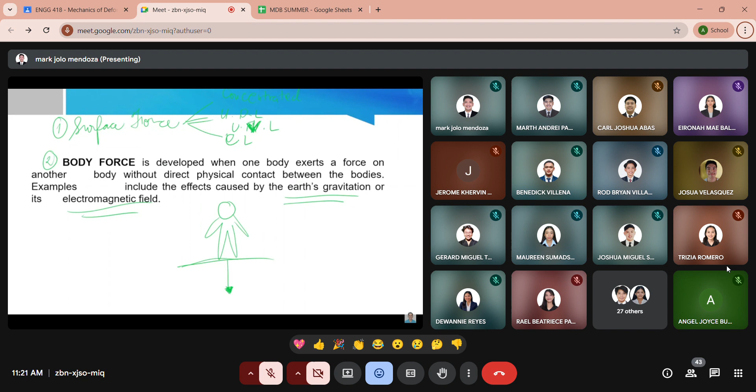Itong mga support reactions naman - ito yung mga surface forces that develop at the supports or points of contact between bodies. Tandaan nyo ito, for example itong beam, kung papansin nyo, yung type of connection niya is cable. So yung cable na yan, since siya ay may contact with the beam, nag-exert siya ng surface force.

Kapag cable yung given, ang in-exert niya is itong force na to, one unknown lang. Wherein, this is not really one unknown since may angle siya, so meron itong x component at y component - you need to consider the angle. Kung saan yung direction ng cable, yun lang yung force niya.

Then kapag roller naman, kapag sinabi sa tanong na may supported siya ng roller, yung force na ine-exert niya ay pataas, in vertical direction. Automatic yan pag roller.

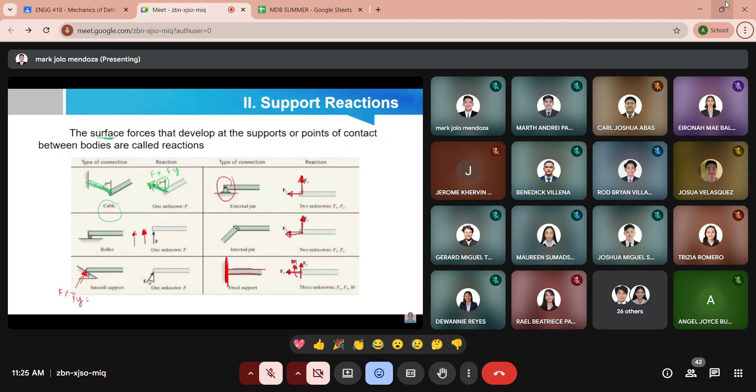Then syempre you already know this, equations of equilibrium. Kapag sinabi natin equilibrium, kailangan meron tayong balance of forces. Equilibrium of a body requires both a balance of forces to prevent the body from translating or having accelerated motion along a straight or curved path, and the balance of moments to prevent the body from rotating. This can be expressed mathematically by the two vector equations: summation of forces equals 0, and summation of moments equals 0. Kasi kailangan hindi mabago, o kailangan ay yung ating structure is safe or hindi siya mag-fail - yan yung equations of equilibrium natin.

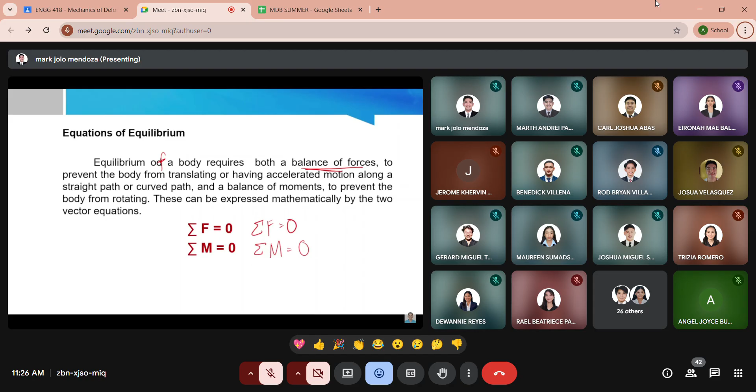Then, one of the most important applications of statics in the analysis of mechanics of materials is to be able to determine the resultant force and moment acting within a body, which are necessary to hold the body together when the body is subjected to external loads.

In order to obtain the internal loadings on a specific region within the body, it is necessary to use the method of sections. What is the method of sections? For example...

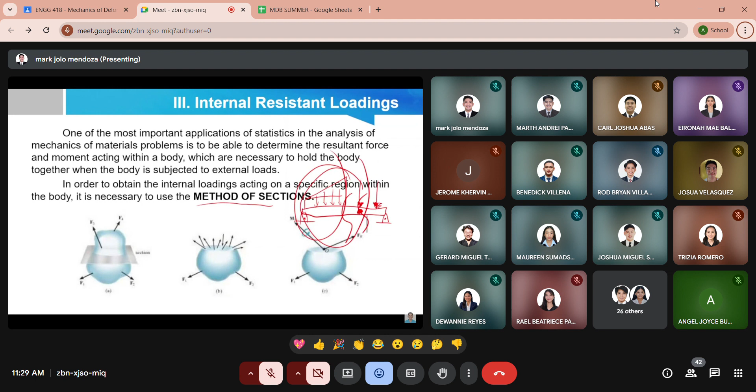So what are the types of resultant loadings? The first one is the normal force. This force acts perpendicular to the area. It is developed whenever the external loads tend to push or pull on the two segments of the body. For example, this is your force, and this is the area you're considering. It hits perpendicular, at 90 degrees. That is what we call normal force.

Then shear force is developed when the external loads tend to cause the two segments of the body to slide over one another. There's sliding, contact, for example between two plates. When these two objects slide with each other, the shearing force is experienced at this part. So that's where shearing force is experienced because the structure rubs or slides past each other.

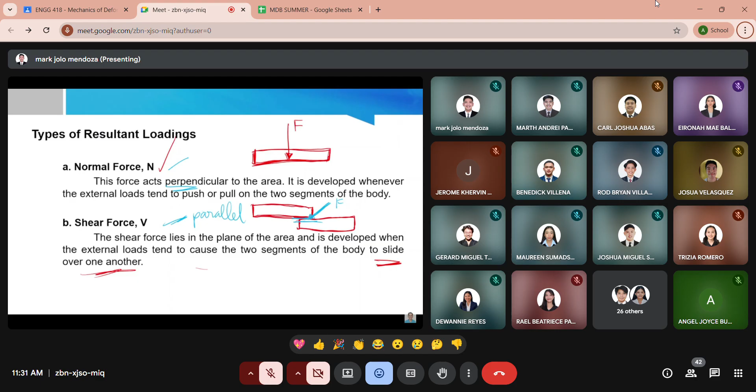Then torsional moment or torque is developed when the external loads tend to twist one segment of the body with respect to the other. This is expressed in Newton meter. The main difference is that torsional moment involves rotation - it has a twisting moment, it rotates.

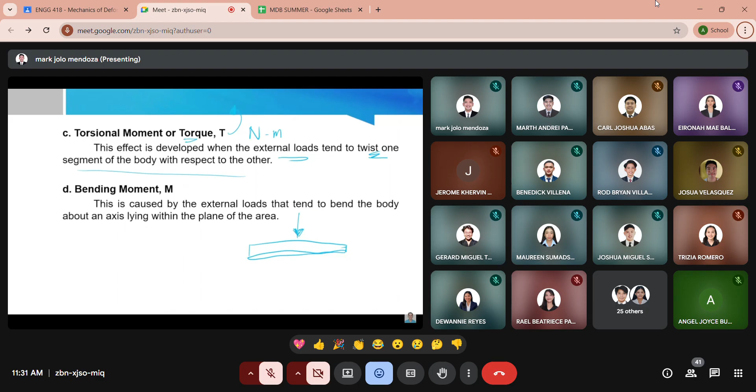Whereas with bending, like for example this beam - we apply a load, this is the external load we apply. What happens to the beam is it will bend like this. So this is bending moment.

When we talk about torsional moment, this usually happens in shafts. For example, this is the shaft. When it experiences external loads, it will tend to rotate. So that is torque or torsional moment. That's the difference between torsional moment and bending moment.

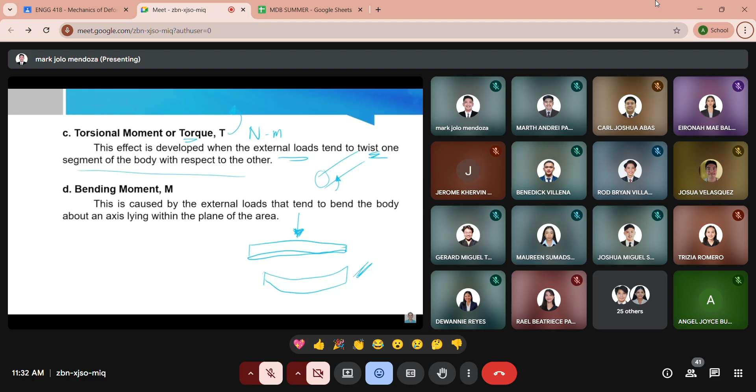So this is just a diagram showing the different forces and moments experienced when a body is applied with external loads.

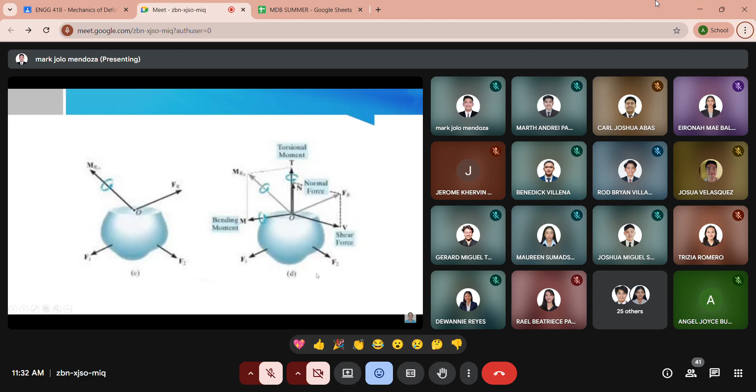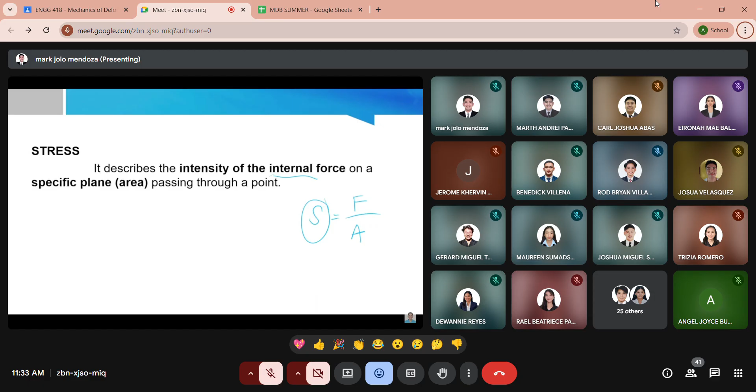Next is axial stress. First let's talk about stress. Stress describes the intensity of the internal force on a specific plane passing through a point. This is basically force applied per unit area. When you apply a force on a specific area, that point experiences stress. So stress is basically force over area. When we talk about axial stress, this is the intensity of the force, or force per unit area, acting normal or perpendicular to the area.

If the normal force pulls on the area, it is referred to as tensile stress, whereas if it pushes on the area, it is called compressive stress.

So sigma is equal to P over A, wherein P is our force, the internal resultant normal force, which is applied through the centroid of the cross-sectional area, and A is the cross-sectional area.

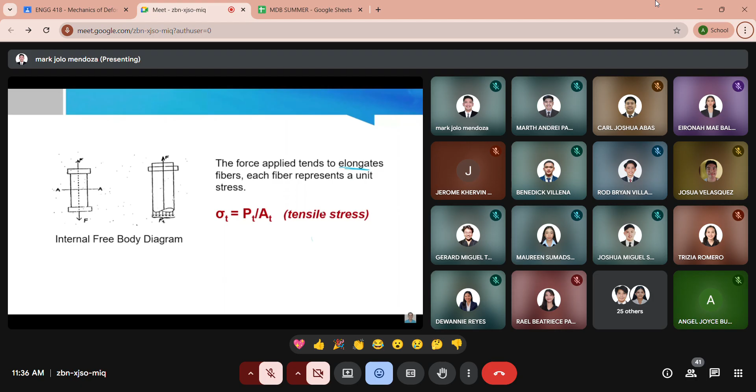Whereas when it tends to shorten the fibers - each fiber represents a unit stress - this is a compressive stress, when our forces tend to compress our fibers or our structure.

Then when we say shearing stress, from the word itself - the forces are parallel. So this is a stress caused by a shear force which tends to slide a member with respect to another.

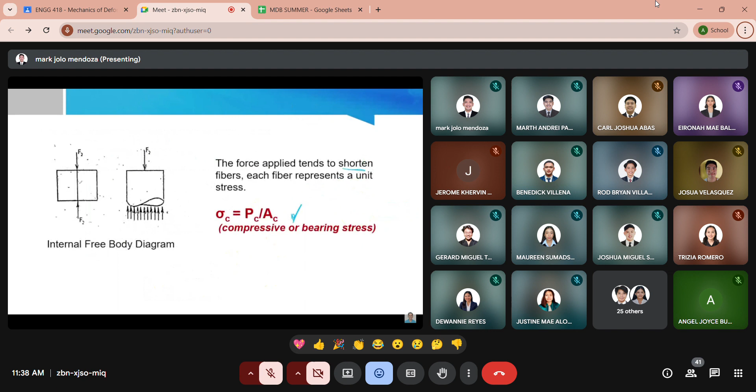But the difference is, earlier this P was still a force, but a normal force - the force perpendicular to the area. Whereas for shearing force, this is the force parallel to the area.

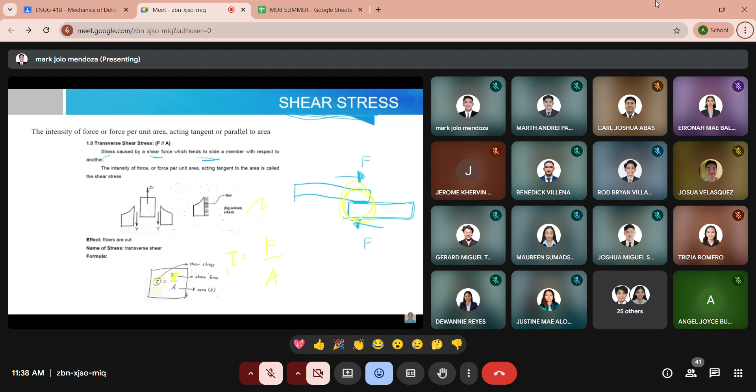So that's our formula for shearing stress. When this is a single shear, it's called a lap joint. Notice only this part experiences shear - only there does it experience shear.

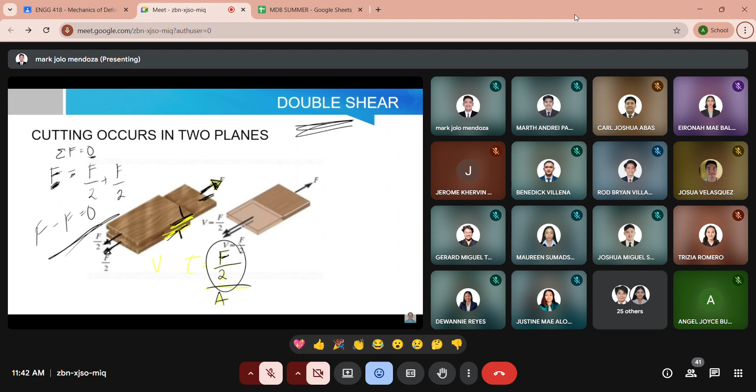So dito muna, let's just focus first on analysis ng internal loadings. I think next lesson yung may example ng actual stress and shearing stress. So dito muna let's focus on answering the internal loadings ng ating structures.

Paano natin siya gagawin? Una, kailangan nating i-establish lahat ng support reactions. Kailangan nating malaman kung alin segment yung may support reaction o kung alin yung wala.

At pagkatapos noon, need mo namang i-consider yung iba't ibang loads pa, like for example yung concentrated load, then yung uniformly distributed load, uniform varying load. Need mo silang i-consider, kuhanin yung mga resultant forces, and then pag nakuha niyo na yon, you can draw another free body diagram.

Kailangan niyo mag-establish, kailangan tama yung free body diagram niyo, considering all the supporting reactions and other external loads. Pag na-establish niyo na yan, kailangan niyong kuhanin yung equations of equilibrium, either the summation of forces equal to zero.

So this is the procedure for analysis in solving for internal loading. Let's have an example here.

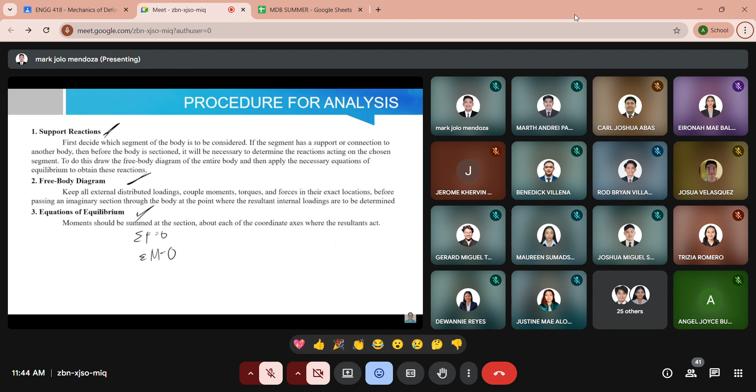Analysis, una, ang sabi natin, kailangan nating i-establish ang support reactions. Anong unang gagawin? Ang unang gagawin, sinabi sa tanong na ang shaft ay supported ng dalawang journal bearings.

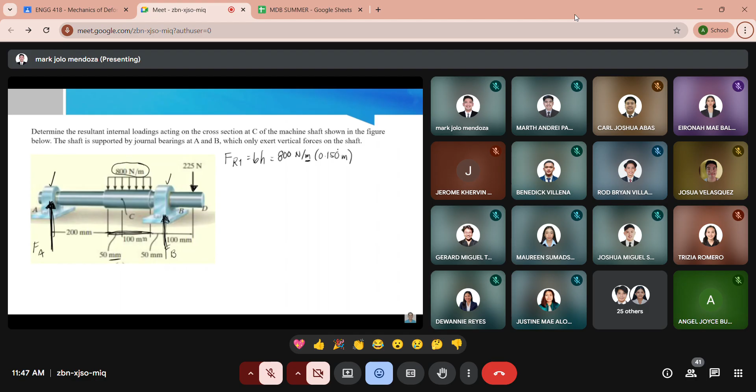So that's 800 Newton per meter times ano yung base niya, that's 150 mm. Tandaan, this is 150 mm, at ito ay naka per meter, so this is 0.150 m. This is equal to 120 Newton.

Yung position niya, ang position niya is at 1/2 ng base. So this is 1/2 times kalahati ng 0.150 m is 0.075 meters. Pwede natin siyang i-drawing kung ito ay 50, kung ito ay 50, at yung X1 ay 75 millimeters, so we can say na nandito siya sa part na 'to.

Nandito yung X1. Ano pa yung nakalimutan nating loadings? Wala na, so puwede na tayong mag-drawing. Second step is to draw a free body diagram. I-analyze natin, i-redraw natin yung shaft. Yan, for example, yan, sige, wait lang.

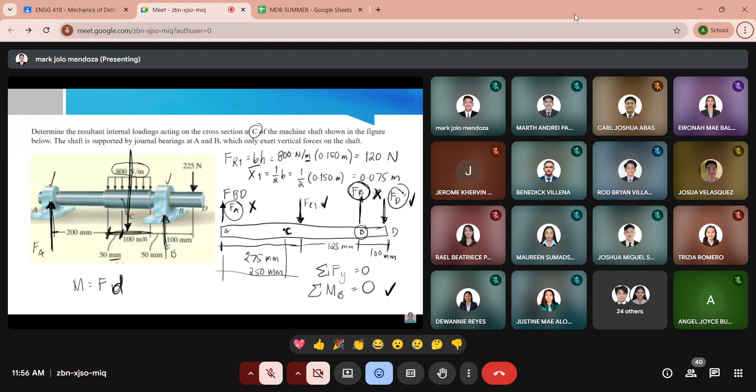What else are we missing here? FR1 is here, pointing downward. So the distance here is 275 mm. A to C is 250 mm. Then the distance from FR1 to B is 125 mm. Then B to D is 100 mm. Yes, that's correct.

That's our free body diagram. So again, let's take the moment at B. Moment at B, wherein counterclockwise is positive. Counterclockwise is our reference, counterclockwise is positive. So look, analyze this.

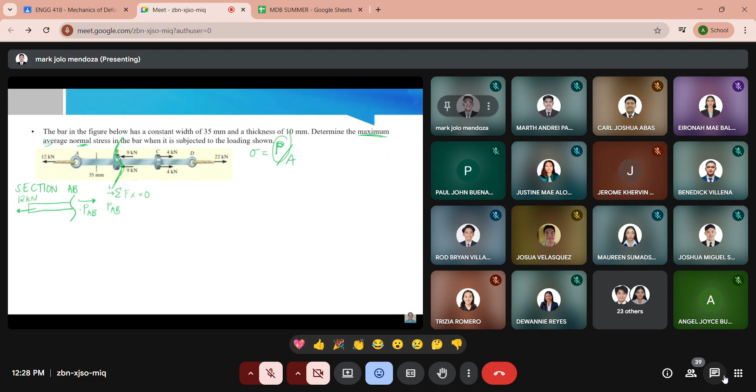Wala na. Ano yung internal loadings dito? Meron tayong internal force ni AB. Ngayon, since yung external force ay going to the left, para maging equilibrium yung internal loading natin at AB is going to the right. Since siya ay horizontal component, this is PAB is positive, going to the right is positive, then minus 12 kilonewton equals 0. Ibig sabihin, ang PAB ay equal sa 12 kilonewton. So, nasolve na natin sa section AB.

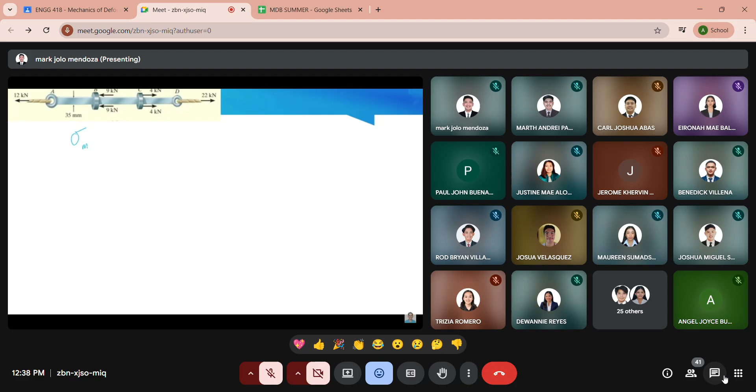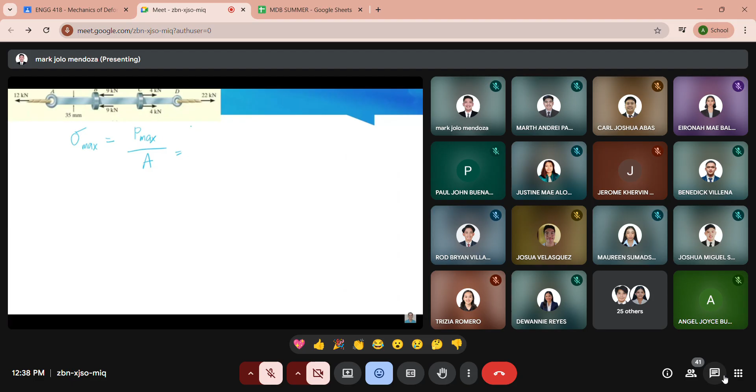So, yan yung gagamitin nating value in solving for the maximum normal stress, which is equal to the maximum na internal loading over the area. Again, ang ating maximum internal loading is 30 kilonewton. So that's 30 times 10 to the third Newton. Kasi kilonewton over area. Anong area natin?

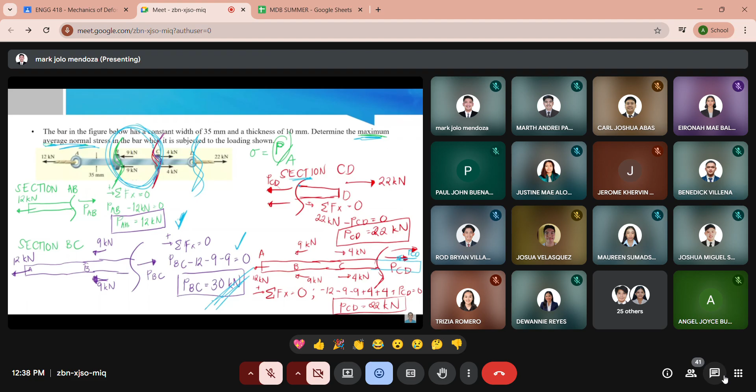Since this is a bar, sabi, this is a bar. So this is a rectangular bar. So this is just length times width. And in this case, ang binigay is thickness. So that's just width times thickness. Ang width natin is 35 millimeter times ang thickness is 10 millimeter. So this is equal to Newton per mm squared.

Newton per millimeter squared. And Newton per millimeter squared is just equal to megapascal. So solving that, it will give us a value of approximately 85.7 Newton per millimeter squared or 85.7 megapascal. And I want you guys to complete the decimal sa pagsosolve. Lahat ng decimal isusulat sa pagsosolve.

Ibig sabihin, ang maximum normal stress na-experience is at point or is at section BC at 85.7 megapascal. Again, this is just an approximate or this is just already rounded off pero sa calculation nyo ay yung buong decimal yung gagamitin nyo. So, hanggang dyan muna tayo ngayon. Hanggang dito lang yung discussion natin. And I want you to be familiar with the units ha.

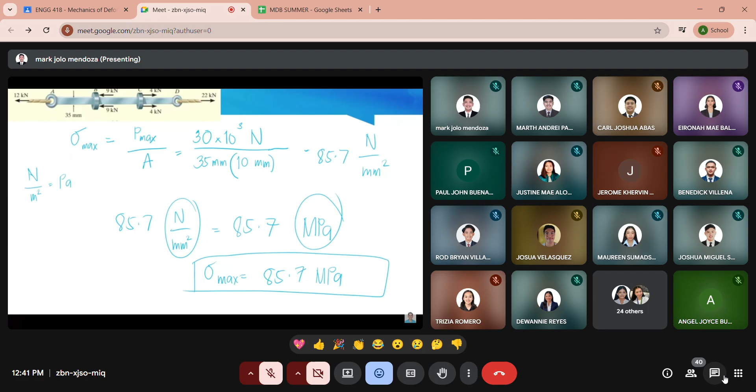And let's continue agad ng lesson 2 tomorrow, which is deformation and more of the shear stress and axial stress, axial deformation and shear stress pa rin. So yun, hanggang dito lang yung ating discussion muna for lesson 1. Thank you.